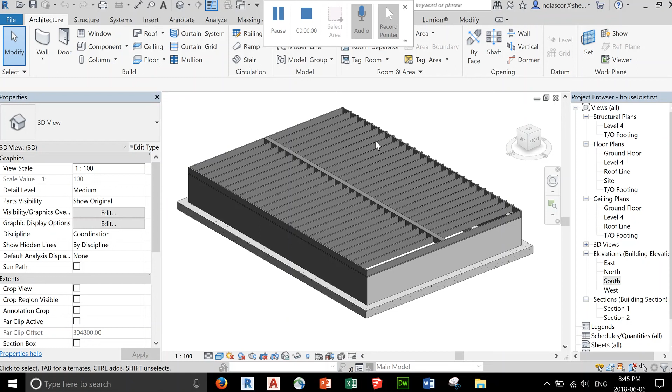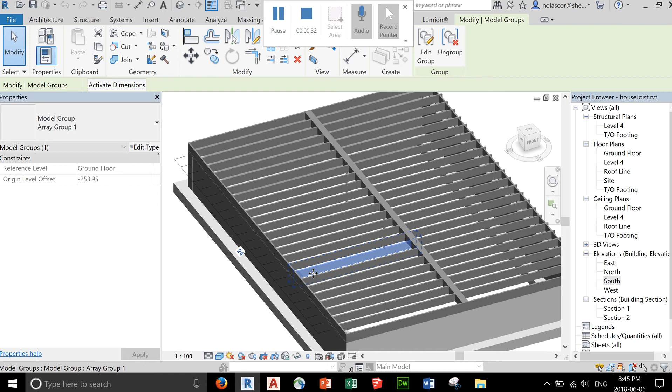Next, we're going to try to learn how to place some wood construction, which can be used for your residential project. Normally, you don't want to over model, especially when you're doing the structural system. So you might do this only to show the detail, but not for your whole project. So maybe just a portion of your project, and you can save this as a separate file just to demonstrate how the construction is going to be done. Okay, so let me close this.

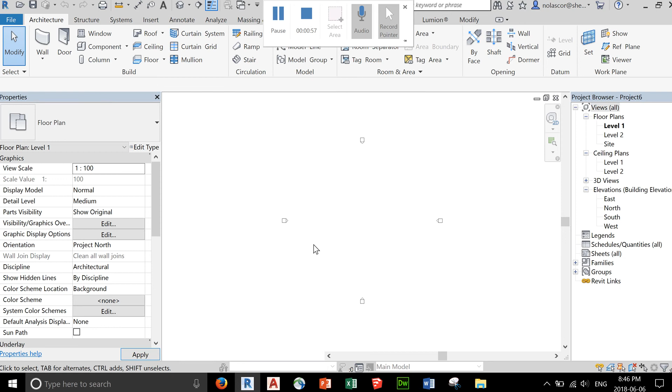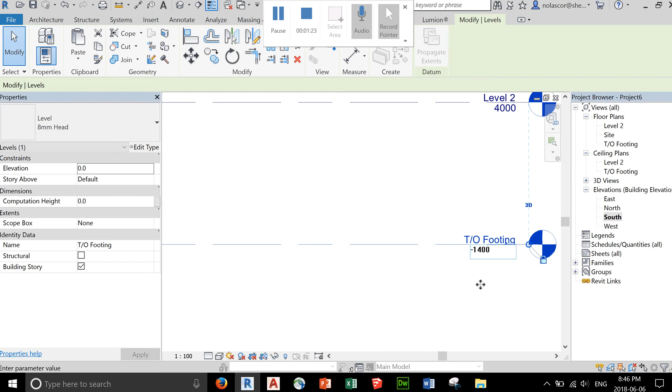And let's start a new project using the same template. And from here, let's create our levels going to the south elevation. Let's rename this as top of footing, at negative 1400. And let's just name this as our ground floor. Say yes to that so that the naming convention will be synchronized. And let's just place this at maybe level 0.

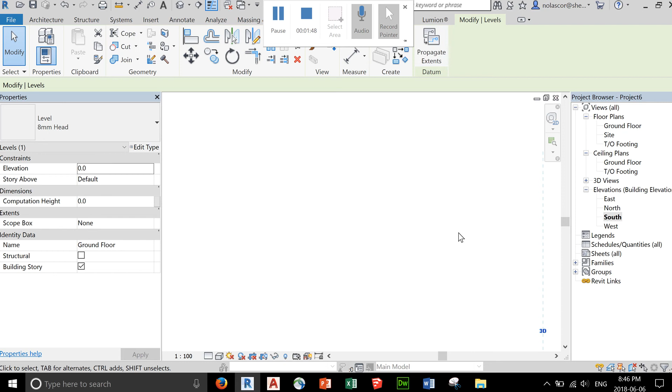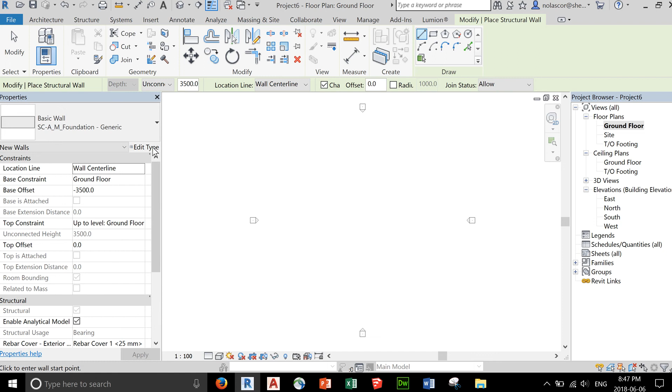Okay. Then we move to our ground floor plan. And we're going to create our structural wall system. So wall structural. Make sure you use the foundation as your template. You can edit this type. Currently it's at 300. We'll leave it at that. So click OK. Using the rectangle tool, we're going to create a 10,000 by, let's say, 7,000.

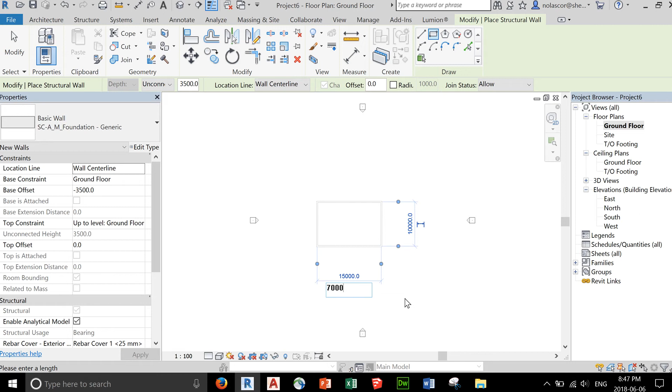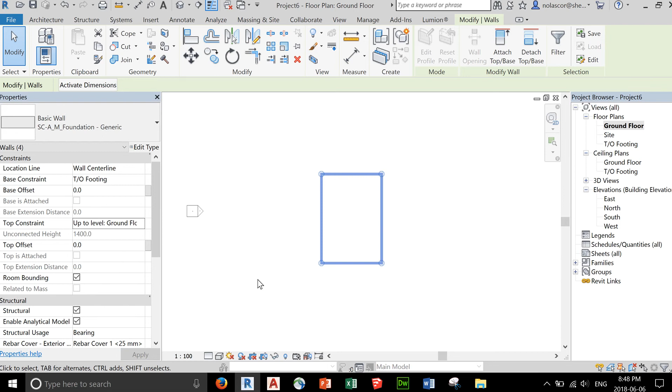Wall system. Now, I did not set the levels, so I can hover over one wall, hit the tab key so that it will highlight all the walls in that chain, and select. So this starts at the ground floor plan with the level 0, and the base will be the top of footing, and top constraint will be ground floor. Okay, so if you go to our south elevation, we'll see our foundation.

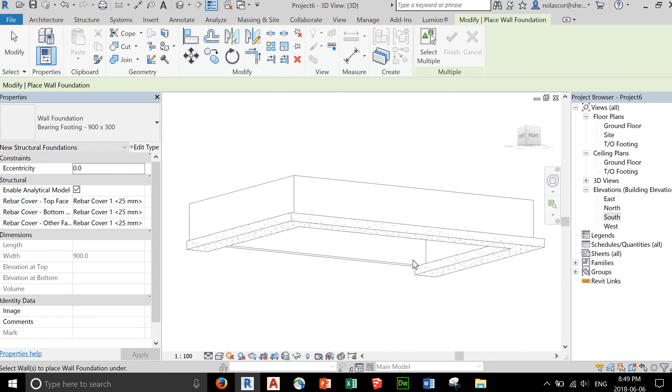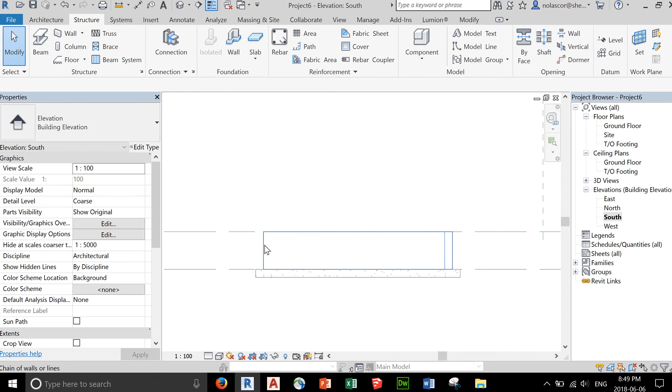And then in a 3D view, let's add our structure wall footing. Again, we'll just use the default for now. Okay, and then we're ready to bring down the wall, since that level would be maybe the ground level, or level for our finished floor. So again, hover over one, hit the tab key, select, and you might want to bring this down to the level where you will support and add the thickness of the wood joist and the wood plate. So that should have a total of 292.1. So I have pre-calculated that.

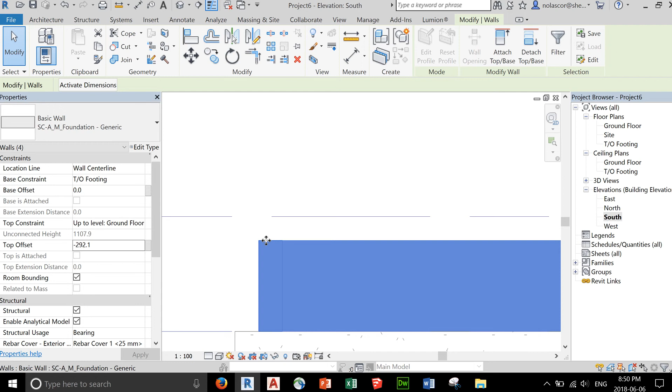So top level with a top offset of negative 292.1. Okay, so that's adding up the joist and the sill plate and a sheathing. So we'll bring that down. So first we'll add the plate here. So let's go back to our ground floor plan. Let's select a fine detail. We're not going to see that much detail anyway, since this is a basic foundation.

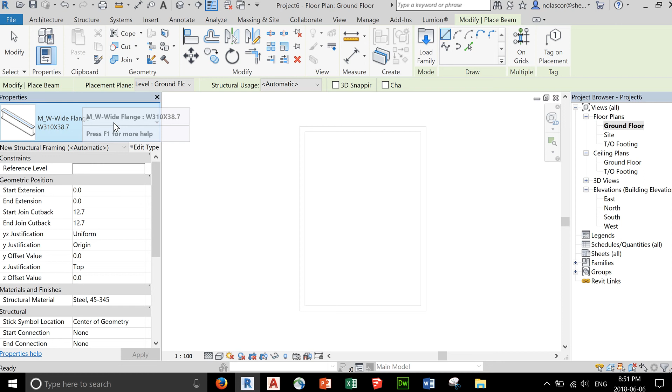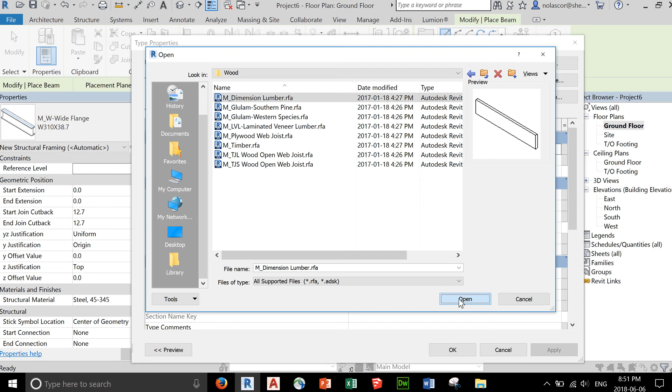And we're going to add a beam. Now, this time the beam that we're going to add is a wooden structural member. So you can edit and hit the load button from here. So load, you want to go to your metric structural framing wood, where you'll find the dimension lumber. Click open and you'll find here different dimensions for your lumber.

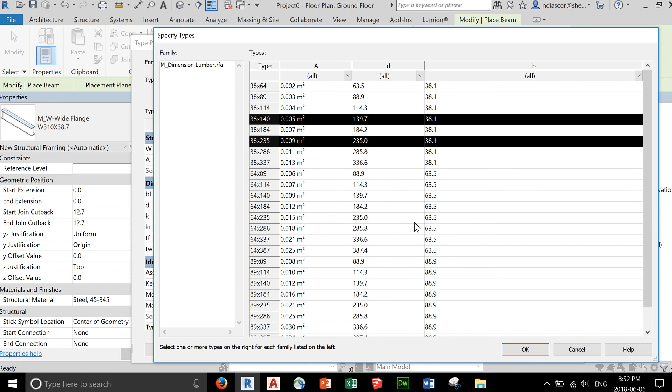So we're looking for a 38 by 140 for our sill plate. So we're going to load that, and likewise we need a 38 by 235 for our joist. Okay, so we'll load that. Likewise, we might need, what do we have here? Well, actually we can select one and just change the dimensions. So we'll just use these two for now and click OK. And for the sill plate, load the 38 by 140. So we'll use that.

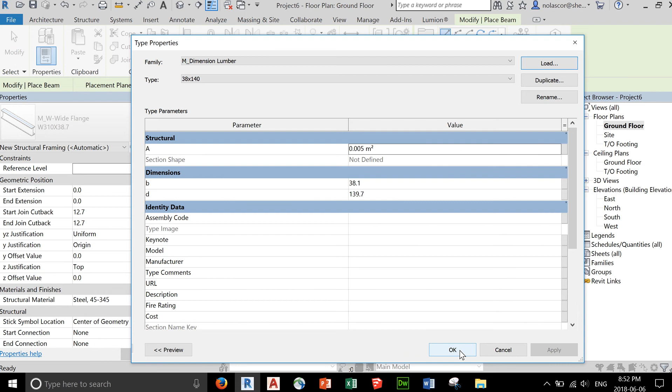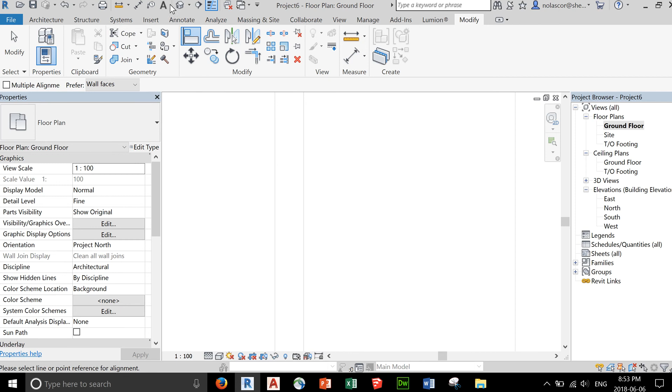Click OK. Now notice that the B dimension is at 38.1 with the D at 139.7. So let's see how that will work. Click OK. Pick lines and select this line right here. Okay. Notice that it was placed at the center, so we'll need to align to that center, this line right here. Okay, let's see how that works. Okay.

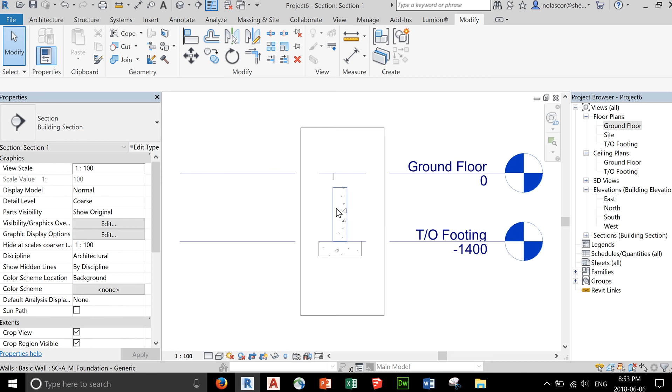Notice that the longer dimension is not parallel to our foundation. So two things we can do. First, let's go to the ground floor plan. I think we were not able to align it. So let's cut a section right there. Okay. So how do we fix this?

If we do a rotate, you can place the pivot point at the corner and try to rotate this like so, but notice that it doesn't want to do it. It's a structural member, so it wants to maintain the unit for the B and the D dimension.

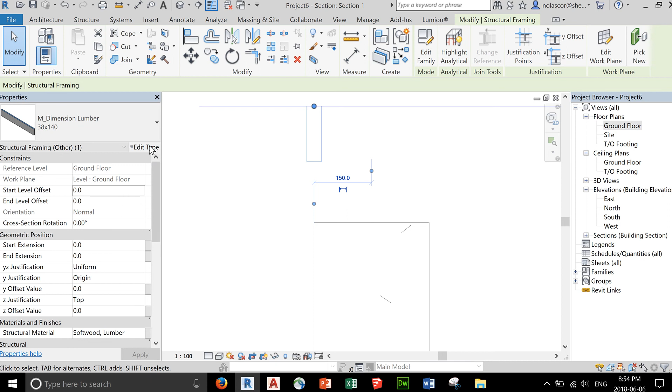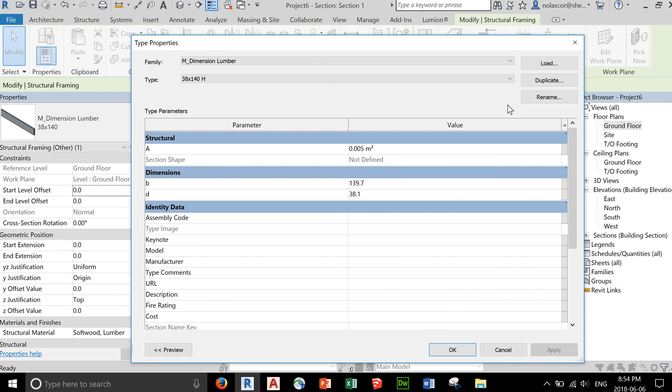So let's just duplicate this and just say horizontal. Let's place H and copy this, Control C, and then paste it here. So that's 139.7, change it to 38.1, and let's replace this with 139.7. So let's do the rotation here. Click OK, and there you go.

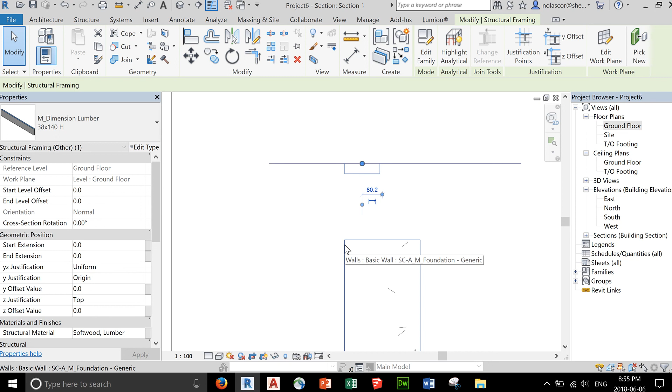Now that we've rotated that, let's see if we can move it. So move from here. Notice that it doesn't want to move down. But we can move it so that it aligns to the exterior face of our foundation. And then all we have to do is change the level offset. So we have the Z offset value.

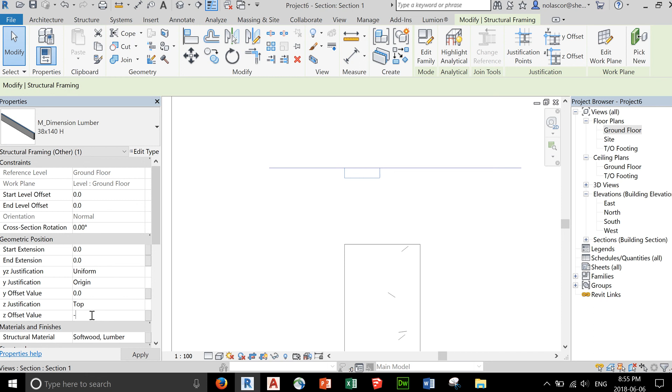Now, how much do we need to bring it down? From here to there is 254. So we can select this again and say Z offset of -254, and that brings it down to its location. Let's go back to our ground floor plan. Notice that it's aligned to the edge of that wall at that intersection, likewise to the wall at that intersection. So that's nice.

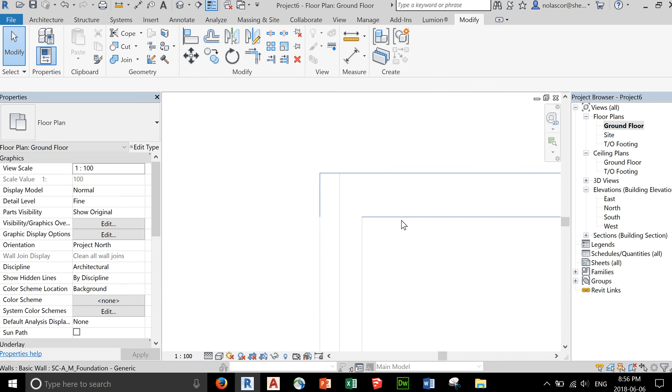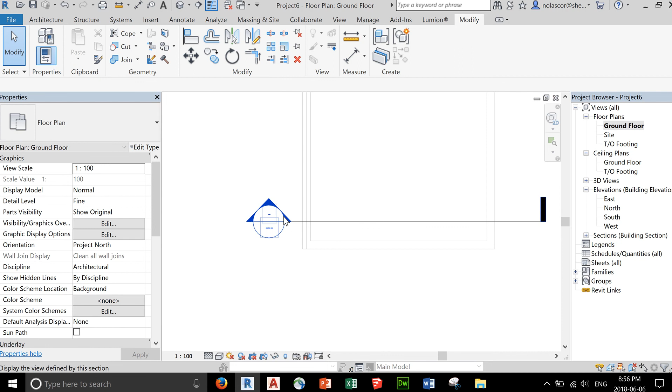Let's select our section line, stretch this so that it will cut up to the other side of the wall, but we need to view it, so you need to actually stretch this as well. That's your cutting range where you find the blue dashed line. Click outside and then double click the section head. There you go.

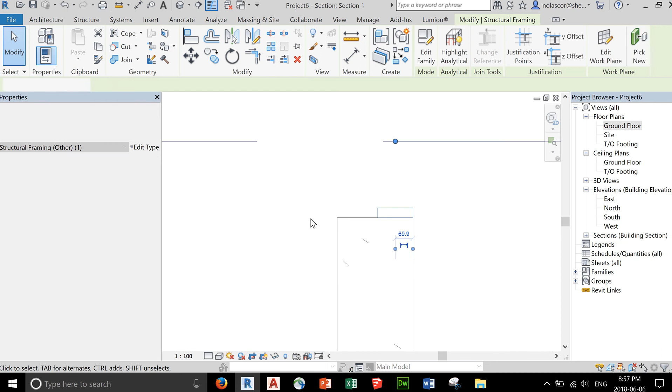Next you can select this and click on copy. Copy from here to that corner. Hit escape. Go back to a 3D view to double check.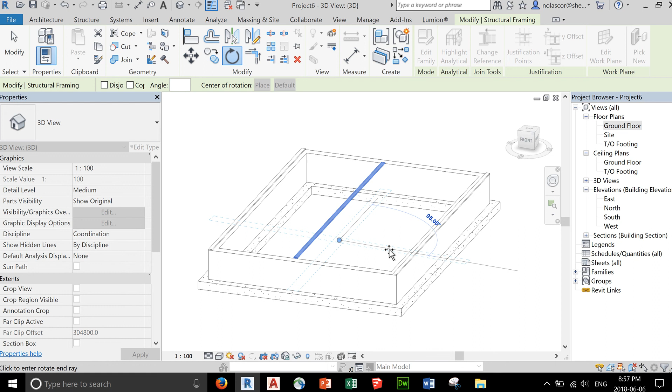Next, you can select this and rotate from here. You want to make a copy first. So let's copy from here to somewhere here. And that's the one that we're going to rotate. So rotate from here, and then that angle, and then let it snap. Is it snapping? At 90. There you go. 90, click.

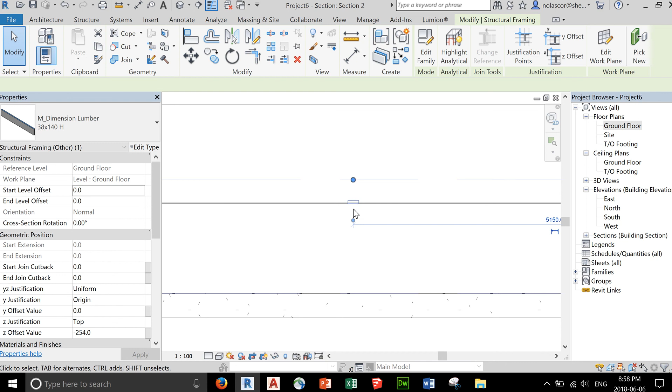This time we want to go back to our ground floor and create a section cutting this way. Double click on that. We want to select this and move it from that intersection to this intersection right here. Okay, let's go to a 3D view.

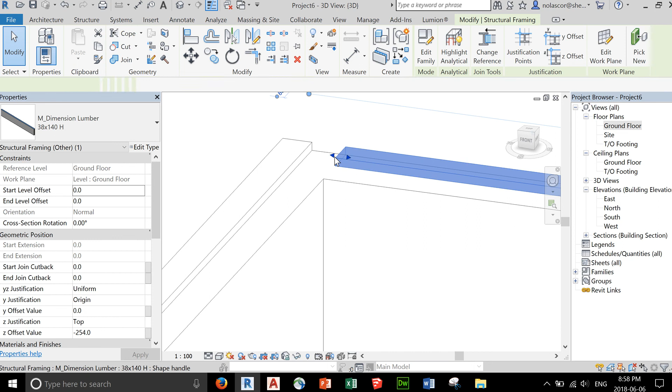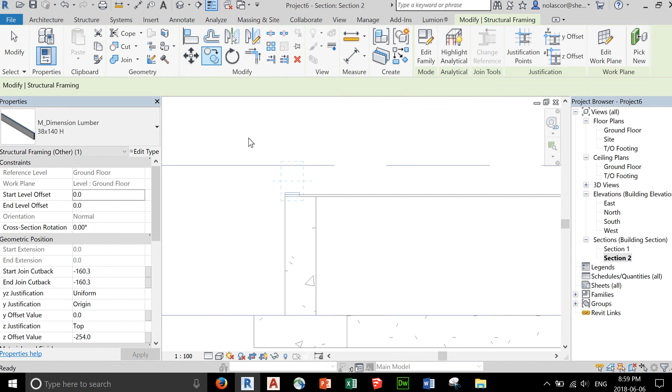You can then select this and extend that. And likewise, select this, grip, and extend to the face. Once we have done that, we can go back to our section view, section number 2, select, copy from this intersection to that intersection. Hit escape twice and go back to your 3D view.